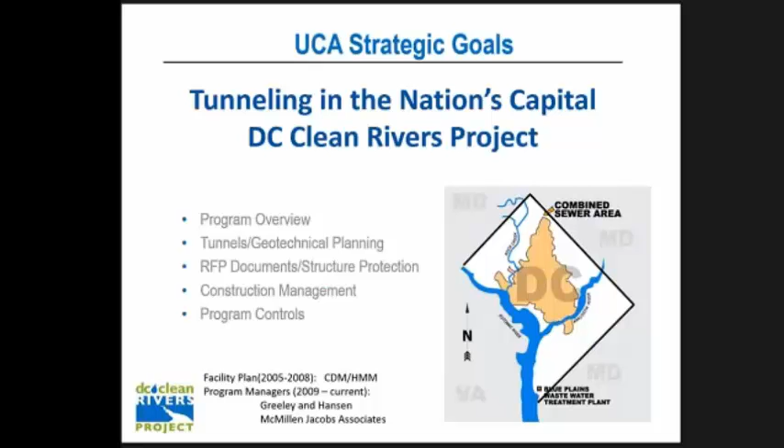So let's talk about tunneling in the nation's capital. I'm going to talk a little bit about an overview of the program, some of the tunneling and geotechnical planning that went on, how we put our RFP documents together, some structure protection, a little bit on construction management, and a little bit on program controls.

This program, the facility plan, was done in 2005 to 2008 by a joint venture of CDM and Hatch Mott MacDonald. And the program managers currently, starting in 2009, are Greeley and Hansen and McMillen Jacobs Associates.

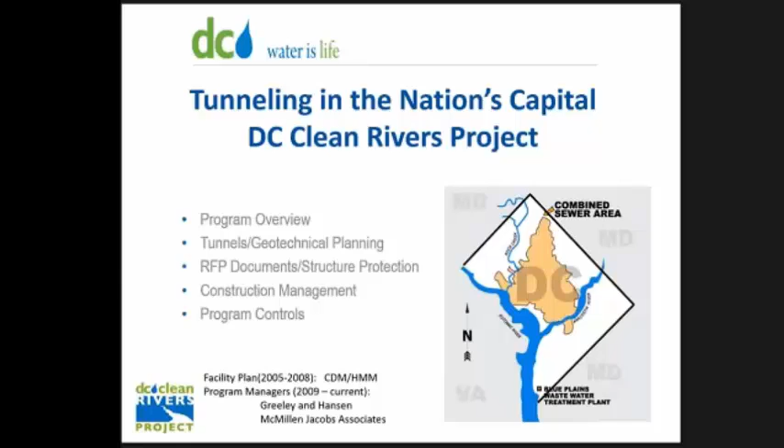So CSO, the challenge we have - CSO is combined sewer overflow, I think most of you understand that. In the District of Columbia, about 1/3 of the area is combined sewer facilities, the rest is separated sewer facilities. We have 53 CSO outfalls along 3 receiving waters: the Anacostia River, the Potomac River, and Rock Creek.

The single largest overflow is into the Anacostia River, where there's about 2 billion gallons a year that goes into the Anacostia River, in about 82 times a year, roughly, there'll be an overflow. So it's basically almost every time it rains, there's an overflow into the Anacostia River.

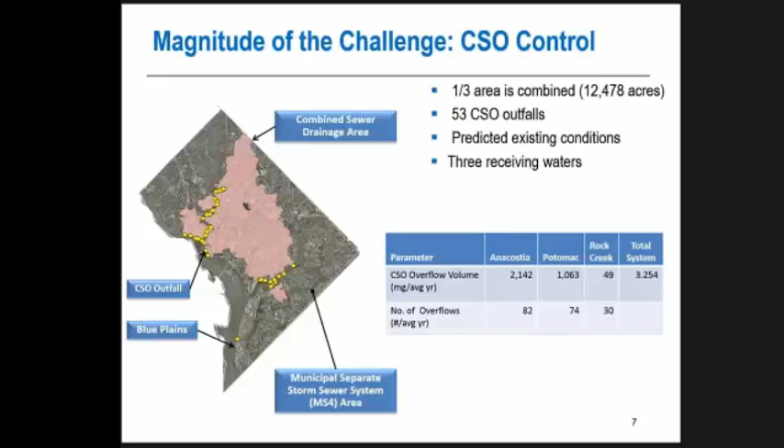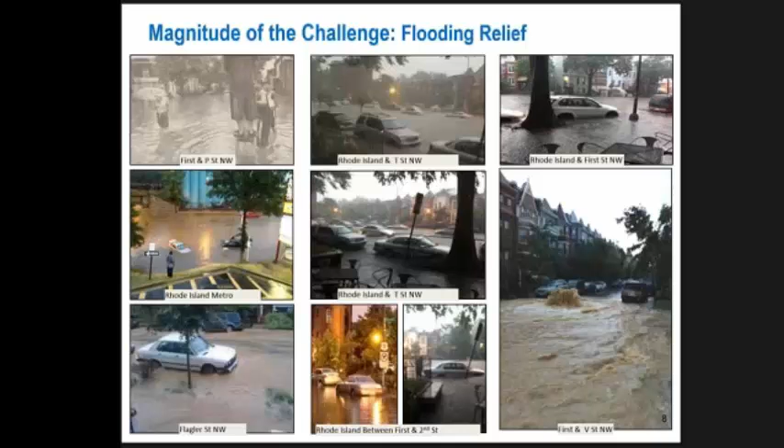So the solution that's been developed is a series of tunnels, both along the Anacostia River, shown in this slide in red, and along the Potomac River, shown in this slide in yellow. There's another CSO system up in the Piney Branch which we may or may not do as a tunnel, we may do as green infrastructure.

There are a number of pumping station rehabilitations shown in this slide as a P. The total value of this project is about $2.6 billion. And then there's a nitrogen removal system going on at Blue Plains as well.

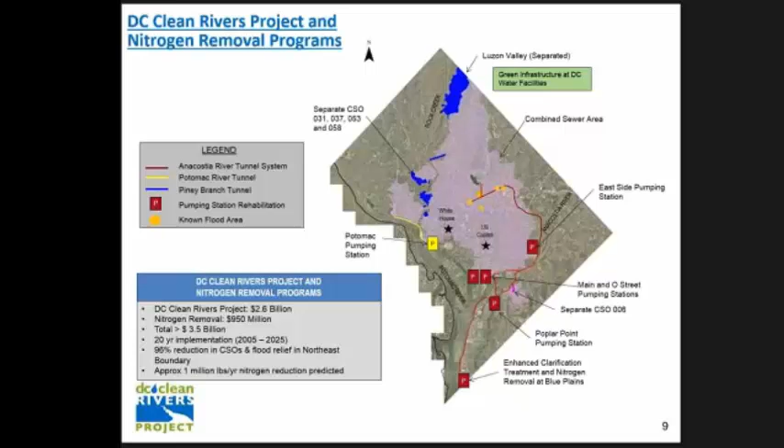We have a 20-year implementation cycle, supposed to be done by 2025, and will result at the end of the day in about a 96% reduction in CSOs, as well as flood relief in the northeastern boundary part of the city. So there was a consent decree.

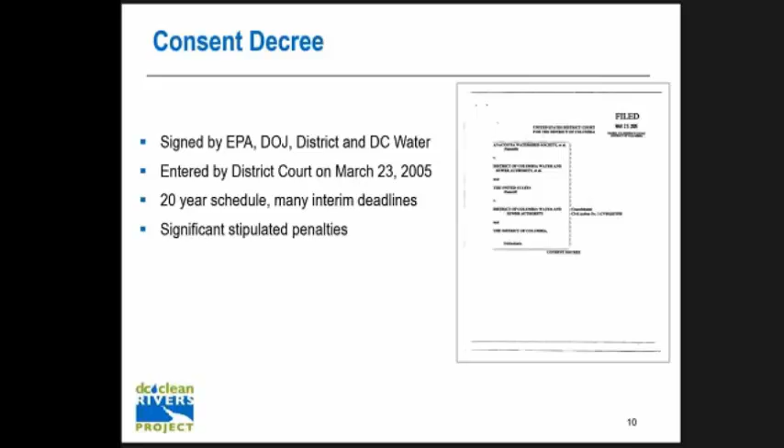The consent decree was signed by the EPA, the Department of Justice, the District of Columbia Government, and DC Water. It was entered into the district court in March of 2005 with a 20-year schedule - that's where the 2025 consent decree date comes from. There were many interim deadlines, one major one in 2018. I'll talk a little bit about that later, and significant stipulated penalties if these dates were not met.

Along the Anacostia River side, there's a series of controls - this slide is a little busy here, but on the right-hand side, the tunnel system starts with Blue Plains down in the lower part of the screen, the letter Y, and goes alongside the Potomac River and crosses the river. The blue line there is the Blue Plains Tunnel, the orange line is the Anacostia River Tunnel, and the green line is the Northeast Boundary Tunnel.

Way up in the northern part is the First Street Tunnel. So all of those tunnels, 4 major tunnel areas, are currently in either procurement or in construction.

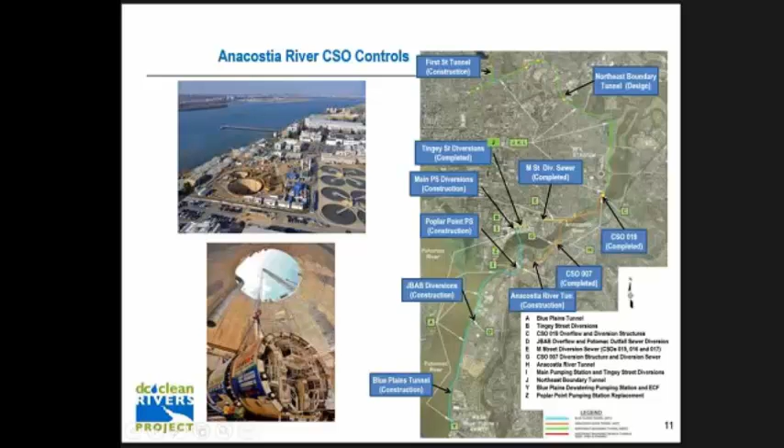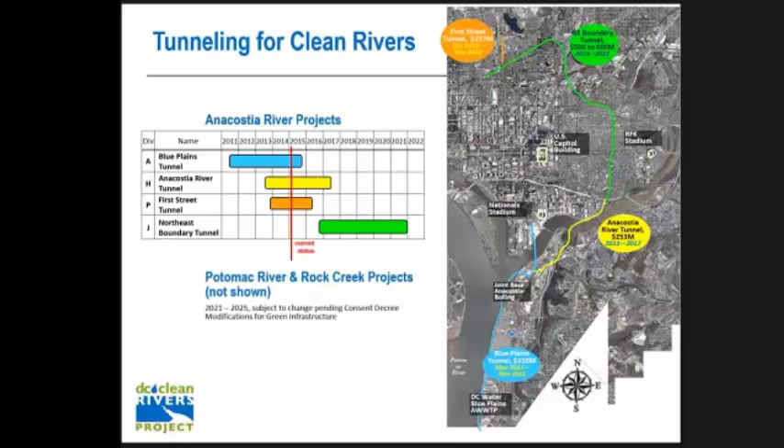I'll go into a little detail on the Blue Plains Tunnel. It's a design-build project, a 23-foot diameter soft ground EPB machine, about 100 feet under the surface, 23,000 feet long, including 5 shafts. The contractor is Traylor Brothers with Skanska and JayDee, a joint venture. Their designer is Halcrow, and the contract value is $330 million. They're scheduled to be complete in November 2015.

As of today, they're 76% complete, with the mining right about up here where my cursor is located, just south of Poplar Point area.

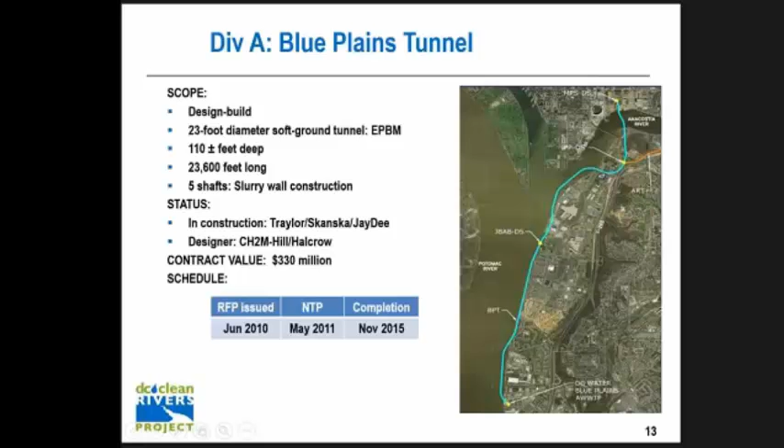There's a dewatering and screening shaft at Blue Plains. This aerial shot is taken over the Blue Plains treatment plant. It's a relatively large dewatering shaft, 135 feet in diameter and about 176 feet deep, all in soft ground. Very complicated shaft, both design and construction-wise. This facility in the back with the pier is the Navy Research Lab. Blue Plains is located just south of the Navy Research Lab on the Potomac River.

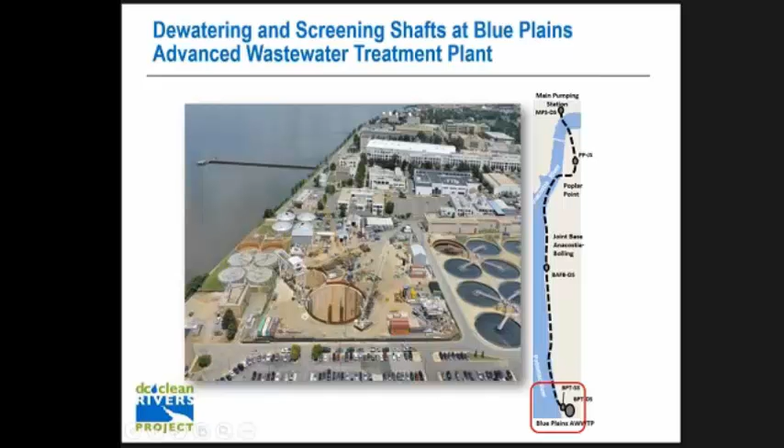The next slide shows a couple of photographs showing the dewatering screening shaft in the air, the TBM cutter head, and then looking down the dewatering shaft slurry wall.

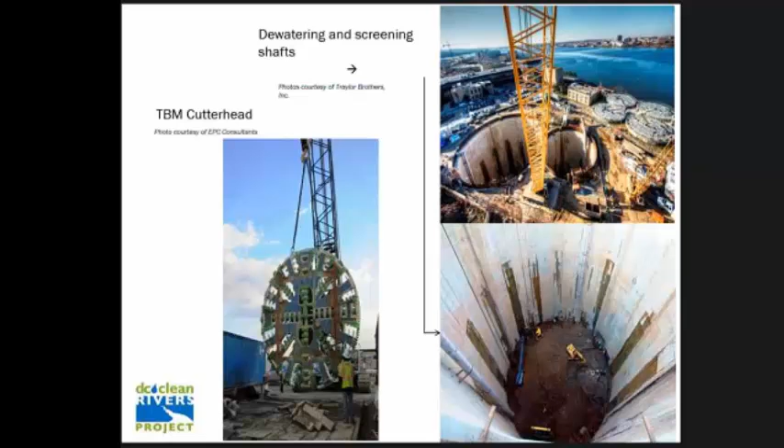This is a photograph of the tunnel boring machine currently being used. It's nicknamed Lady Bird. This photo was taken at the Herrenknecht factory in Schwanau, Germany, before it shipped over here.

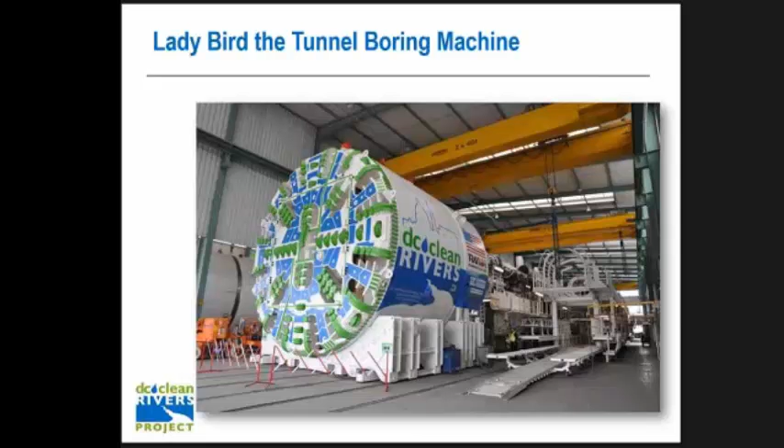These are a couple of shots of assembling the Lady Bird tunnel boring machine. This is down in the hole. The machine went down in the hole in 3 pieces: the cutter head, the tail shield, and the main body of the shield. The crane that set the machine down in the hole is a 660-ton crane, and I was told the largest piece was 475,000 pounds.

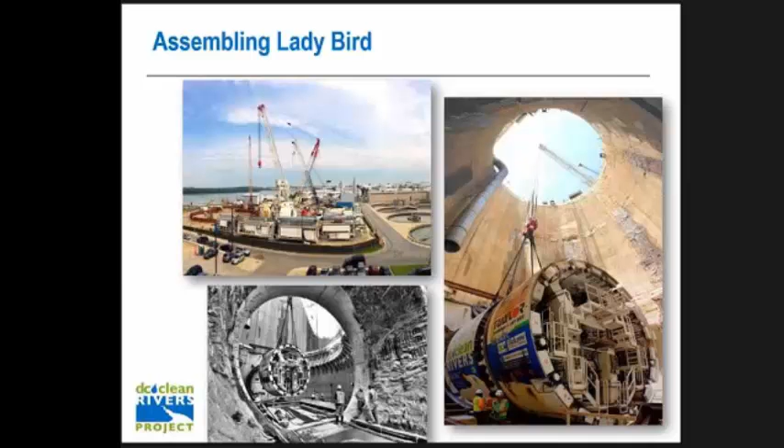This is a shot of the precast liner segments currently in production at the town of Brandywine, Maryland, about 30 miles south of the district. You can see some of the craft people finishing the top of the segments down there.

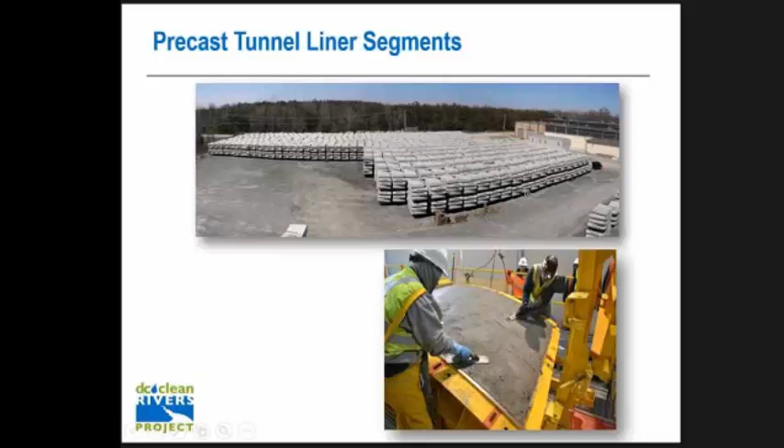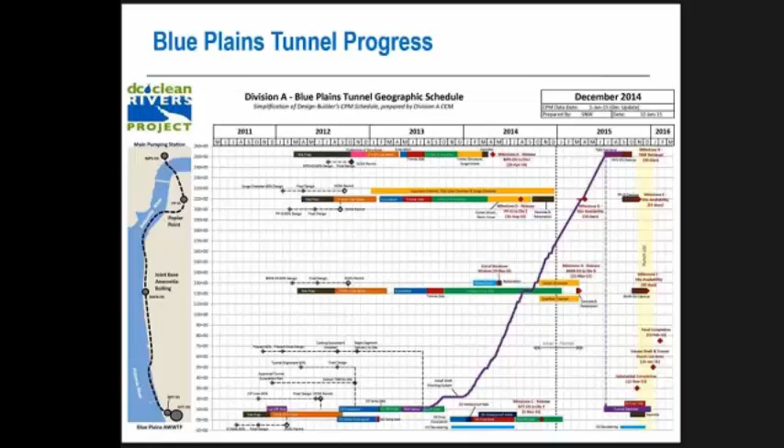The next contract I want to talk about is Division H, what we call the Anacostia River Tunnel. It's also a design-build project, same internal diameter, 23 foot, mostly EPBM with a small NATM component just south of RFK Stadium. The depth is about 100 feet, it's 12,500 feet long, and there are 6 slurry wall shafts along the alignment. Currently under construction by a joint venture of Impregilo, Healy, and Parsons. The designer is Parsons, contract value is $254 million. They got notice to proceed in June 2013, with completion scheduled for 2017.

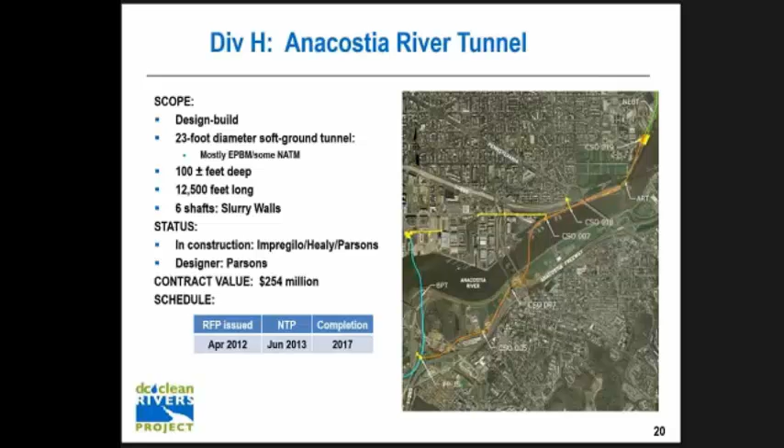This next slide shows an animation we did to show how the tunnel slides underneath a number of pile-supported structures along the alignment. I'll talk more about structure protection later and show some cross-sections, but this gives an idea of the forest of piles and other structures we go under along the alignment.

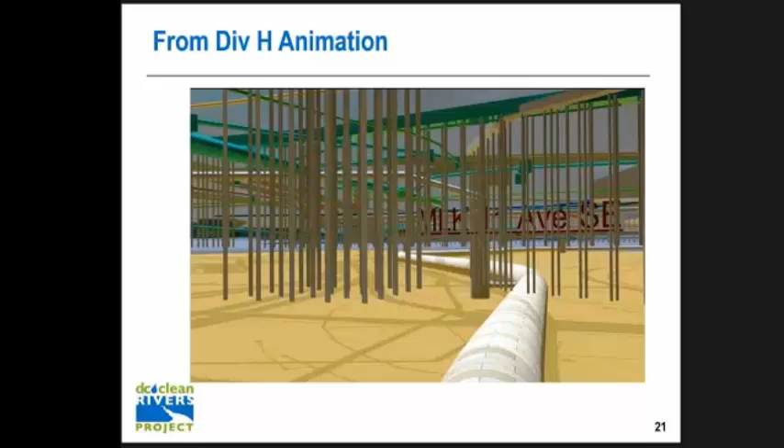The next tunnel is the First Street Tunnel, in the northern part of the city near McMillan Reservoir, a source of water supply for the district. It's a design-build hybrid, in that some structures were fully designed, but others, the tunnel and shafts, the lining, were design-build. We required a 19-foot minimum diameter, though the contractor is actually finishing slightly more than that.

It's anywhere from 80 to 160 feet deep. There's topography in this part of the city, so the start shaft is up on a hill, making it 160 feet at the mining shaft. There are 4 shafts and 3 diversion structures. There's a 10 MGD pump station at the lower end, which will pump out the tunnel after a rainstorm and put it into the normal sewer system.

Their designer is Parsons Brinckerhoff. Contract value of this is $153 million. We gave them notice to proceed in October 2013, with completion scheduled for early 2016.

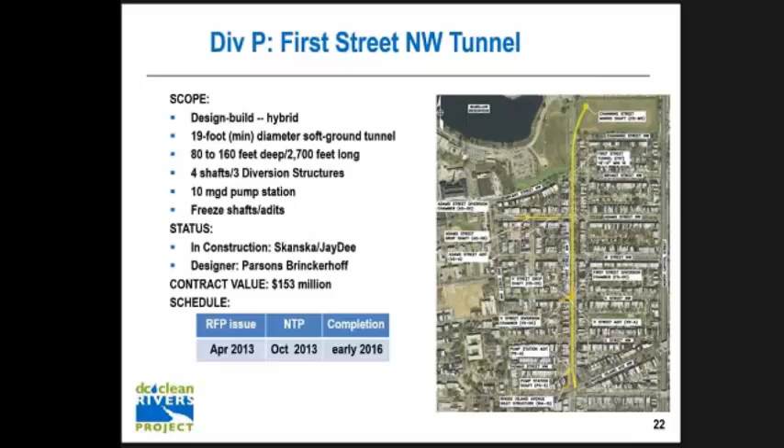This is a cartoon of the residential neighborhood in the area of First Street, taken along Flagler Street to give you a good idea of how near to residences this construction in the street is. Basically, the construction in this neighborhood goes curb to curb, so there's a lot of coordination necessary with the residents. We did quite a bit of that during the design phase, and the contractor and construction manager are dealing with that every day up there now as the work is currently going on.

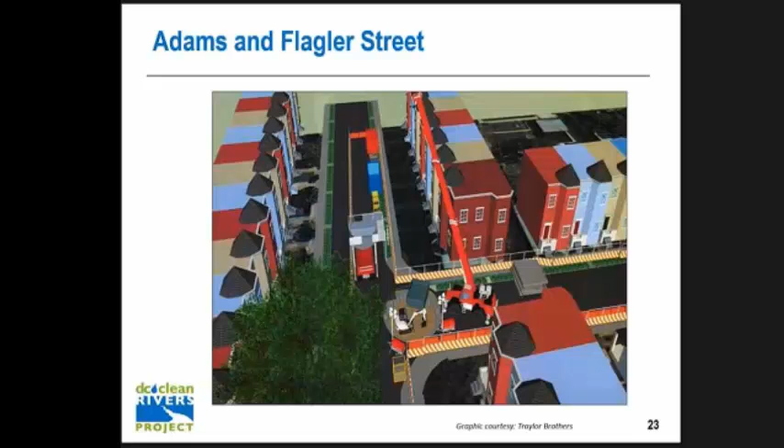Our next contract is the last major tunnel contract on the Anacostia River: Division J, the Northeast Boundary Tunnel. It will be design-build, 23-foot diameter, soft ground, anywhere from 50 to 160 feet deep. This will be the longest tunnel, 27,000 feet long, with 6 shafts and diversion structures along the alignment.

It'll be mined from just south of RFK Stadium. That will be the mining site, and it won't start until the Division H contractor, the Impregilo Parsons venture, is off the site. That's when we'll turn the site over to the follow-on contractor who will mine north out of there. It's currently in planning.

The RFQ will go out the 4th quarter of this year. We'll get a contract value pegged somewhere in the $500 to $600 million range, with notice to proceed in 2017, after Impregilo Parsons moves off the site, and completion in 2022.

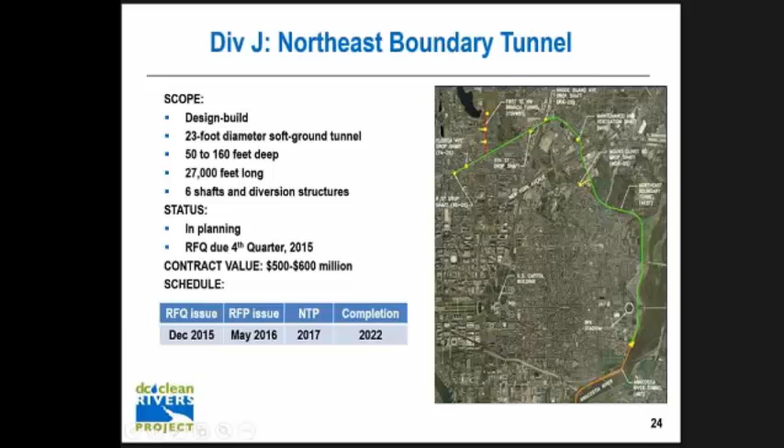The next slide shows a hydraulic profile of the system. We're required by consent decree to provide 157 million gallons of storage, achieved by water in the tunnel up to an elevation of -24. If it keeps raining, the rain will keep going into the tunnel until it fills up to an elevation of about +3, and then it will overflow into the Anacostia and Potomac Rivers at several overflow structures along the alignment.

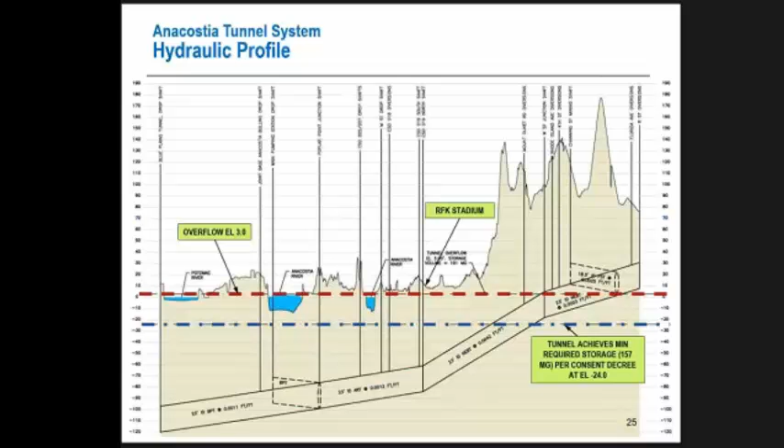We have a couple of different types of drop shafts along the alignment. One is the inline drop shaft, about 55 to 75 feet in diameter. The idea is that the tunnel boring machine mines into the drop shaft, which is used for TBM maintenance. After the tunnel is fully mined, the internals go into these drop shafts, and water drops down the drop pipe, goes around a deaeration channel to release the air, drops over the edge, and goes into an orifice at the bottom. These drop shafts were modeled at the University of Iowa, so we know they will work okay.

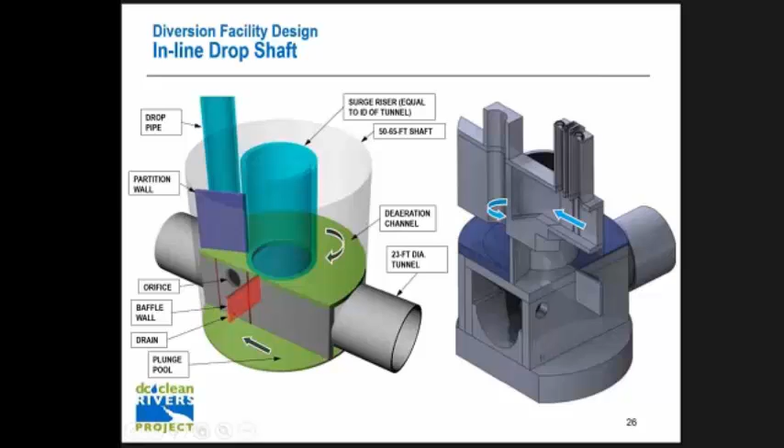The other type is the offline drop shaft, used for less volume of flow. These offline drop shafts handle smaller flows from the diversion structure through the approach channel, down the offline drop shaft and through an adit, where they deaerate. That's how the air gets out in the offline drop shafts.

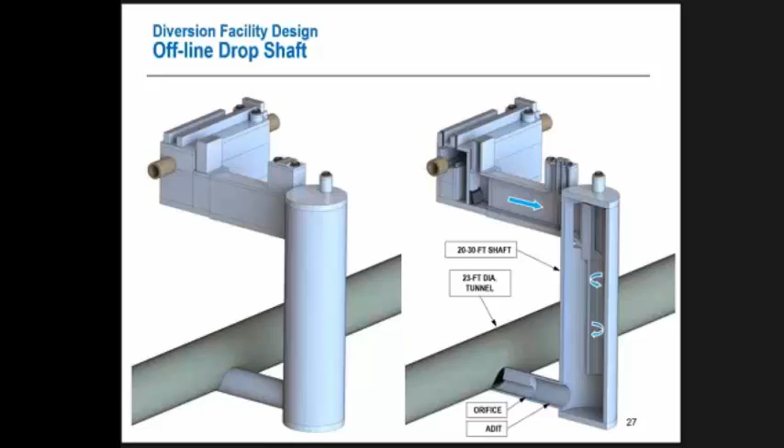I was going to talk about the tunnels and the geotechnical planning involved in the project. The horizontal alignment criteria included wanting it near existing CSOs and pumping stations, and away from underground features such as the Naval Research Lab pier and various DoD storm sewers at the Bolling Air Force Base alignment.

We wanted space for intermediate shafts where we have these online drop shafts, and space for the contractors to work. We followed public rights-of-way wherever we could to minimize the amount of easements necessary. And we wanted to cross railroads at right angles. We weren't always able to do that, but for the most part we crossed both CSX and the WMATA transit lines at right angles.

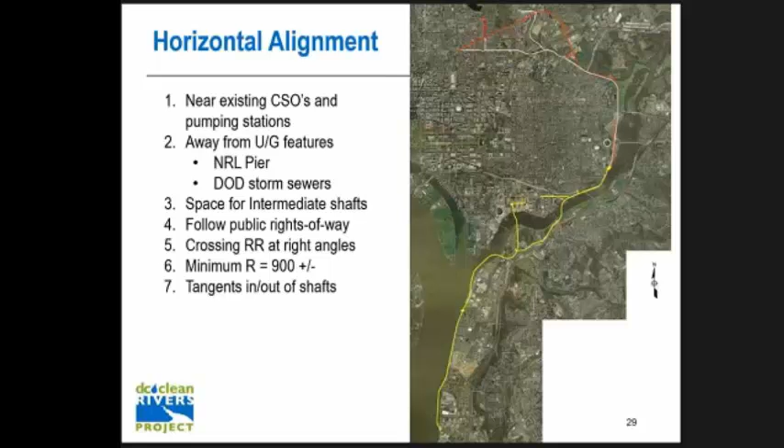We held a criteria of the minimum radius of curve on the tunnel at about 900 feet, plus or minus. I think we're down to 870 feet in some areas, but we didn't want to go much tighter than about 900 feet. We tried to hold a tangent into and out of the shafts to make it easier for contractors to come in and out without having to worry about turning curves.

On the vertical alignment, we had the pump station to go to at Blue Plains. We wanted a minimum grade of at least 0.1%. The depth was actually determined by getting under stuff along the alignment, and that stuff is bridges and DC Water sewer systems, and even DoD sewer systems, many of which are on piles in the soft ground.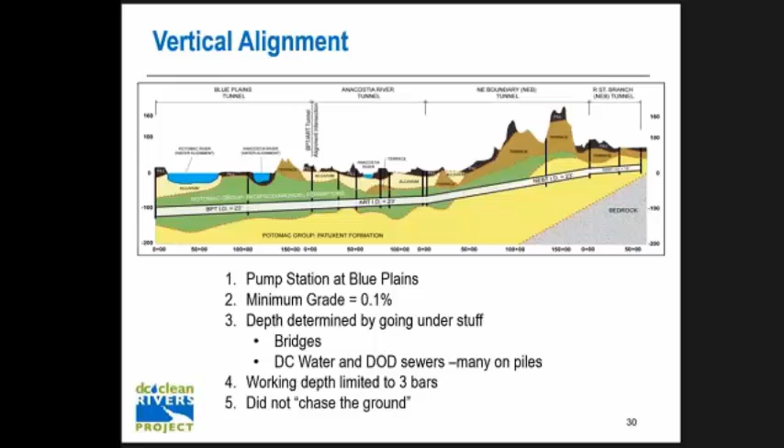This is an example of some of the cross sections along the alignment. The slide might be a little hard to read, but basically we're going under a forest of piles for many of these sewer systems, and we parallel some other sewer systems along the alignment. So we evaluated the zone of influence and what sort of ground subsidence we might see with a certain amount of ground loss in the TBM, and that was all done in the preliminary engineering phases.

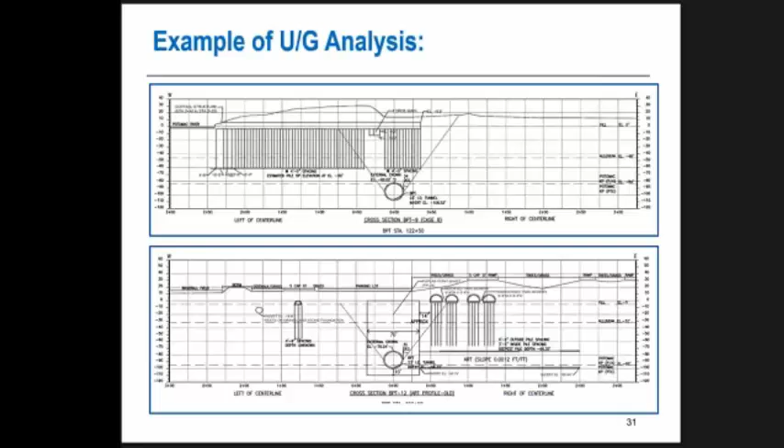So here's the promised geotechnical slide. This is geological investigations. The policy that we had was to have all these geotech investigations done by the owner prior to the bidding phases. That is, we didn't push any geotech investigations to the design builder.

They could, during the bidding period, request additional borings, and in fact they did, and we went out and got some. If they decided that we didn't have enough information for what they wanted to build, we went out and got more holes.

We did several at each shaft location. We did some pump tests, both at Blue Plains and at RFK Stadium. We found actually some flowing artesian pressures on the north side of Anacostia River. It ranged from about plus 14 to plus 20 in the ground units, and then plus 13 to plus 16 range in this area.

You can see in this geological lithology here, the green, the darker green, is the Patapsco Arundel Formation, which is mostly clays and silt. The lighter green at the bottom is the Patuxent Formation, silty clays and sands in the lower levels. We're overlaying on the top with some fill and some alluvium that you can see up on top.

Just for some figures here, the exploration program, we did 242 geotech borings along the alignment. It cost about $9 million in drilling costs and a little over $600,000 in lab testing. We had some geoprobes, mostly for environmental purposes, and geoprobes were a lot less in drilling costs, but substantially more in lab costs due to the lab tests we were running for chemistry permits and waste disposal of that environmental borings.

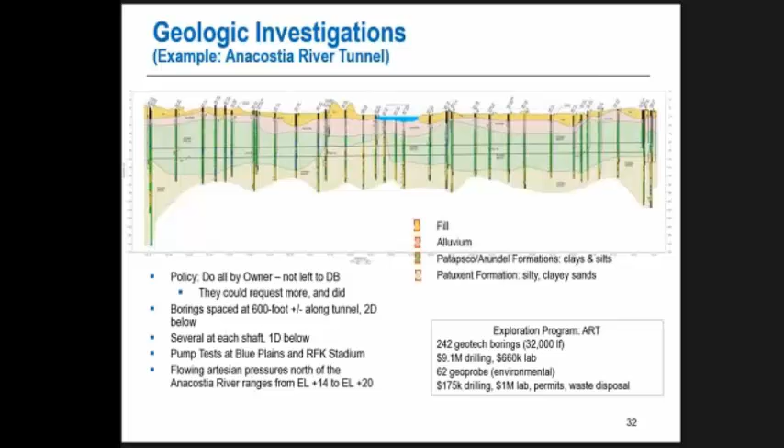So now I want to talk a little bit about RFP documents and structure protection. From the facility plan drawings that were done by the CDM Hatch joint venture, we advanced the design to 60%, to 90%, and 100% before we released them for bidding purposes. That effort was about 18 months for each of the segments.

We did have to modify our general conditions to revise the standard DC Water general conditions from a design-bid-build to a design-build method. The RFQ was scheduled to be complete and shortlisted firms identified when the RFP was ready for release, so we timed it that way.

And we established certain mandatory requirements in the RFP documents, and the drawings would show horizontal and vertical alignments and other mandatory geometries, mostly relating to hydraulic requirements. The wall thicknesses and reinforcing steel was left to the design builders. I'll talk about design criteria here on the next slide.

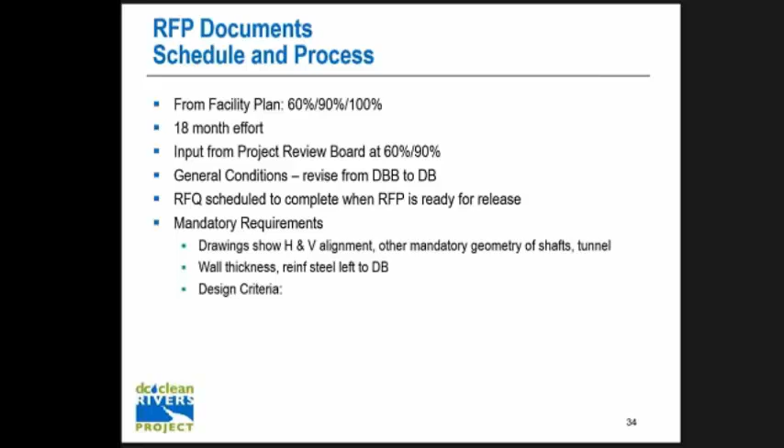This slide talks about the specifications. The Division 0 specs have the standard bidding instructions, contract forms, and all general conditions. In the general and special conditions, we included a baseline report.

We changed the retention practices, we had certain payment provisions. We included partnering, a dispute resolution process, DRBs, escrow bid documents. We had an owner-controlled insurance program.

In the Division 1 section, the design criteria provided included the design life of 100 years, the loading criteria and combinations of that criteria, the seismic criteria, certain limitations on shaft methods that were acceptable. We specified certain factors of safety that had to be used, geotechnical parameters, the leakage requirements, the hydraulic structures, and certain equipment that was necessary.

The Division 1 section is where the requirements are for how the design is advanced, what permits the owner had, what permits the design builder was intended to get, the various contract interfaces, temporary facilities, health and safety, and environmental stuff.

The technical specifications we call Category 2 and 3 were able to be finalized by the design builder. Some of the Category 2 specs included a tunnel boring machine or jet grouting or something like that, where there were certain prescriptive elements included in the outline specs that we gave to the design builders. They were to fill in the rest of them.

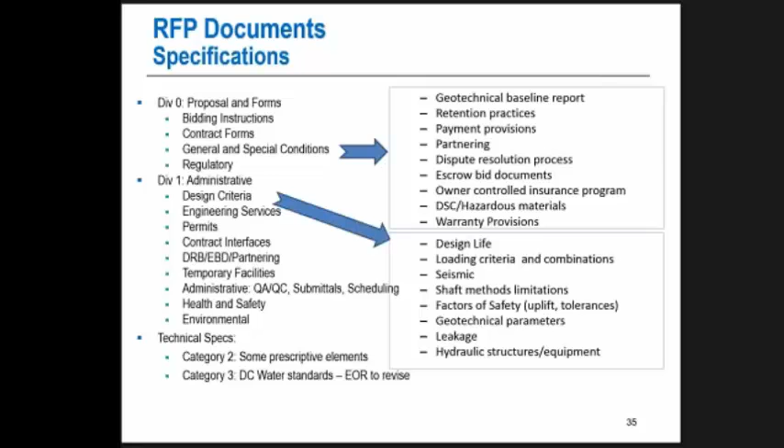On the geotechnical front, we had a GBR. The tunnel had functional baselines with some geotechnical components, primarily for abrasivity and stickiness. The shafts were baselined by borings at the shafts, and we had environmental baselines. Basically, the depth of contamination was specified.

I don't really have time to talk much about functional baselines, but there was a great paper on functional baselines given at, I think it was a RETC conference in DC here a couple of months ago. So look up functional baselines on onetunnel.org and you can get a good idea of what functional baselines are all about.

We also did a GDR with boring logs, lab results, and groundwater and soil chemistry as well.

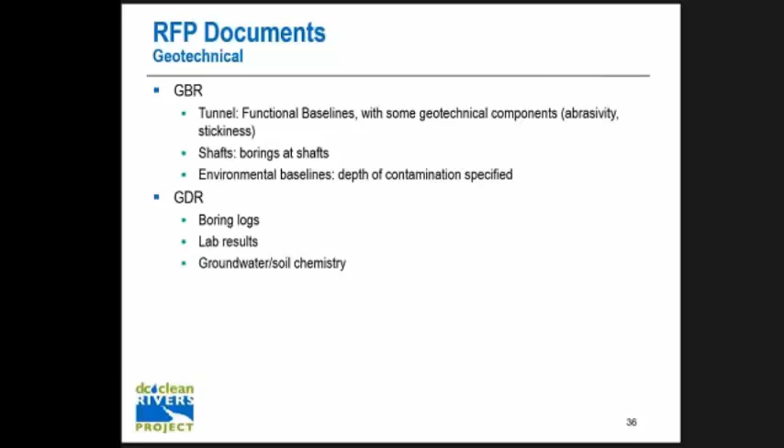I want to talk a little bit about protection of structures. The RFP documents identified the utilities and the various structures that the lines were going under. I showed you a cartoon of that, an animation of that before.

We required the contractors and the designers to do construction impact assessment reports, which required both modeling of soil movement based on their means and methods of construction, and structural modeling to see whether the structures were going to see any distress because of that.

So this picture here is a picture of one of the relatively large sewers that were going under. Some of these sewers, this one in particular, was built in the early 1900s, 1901, 1902 area.

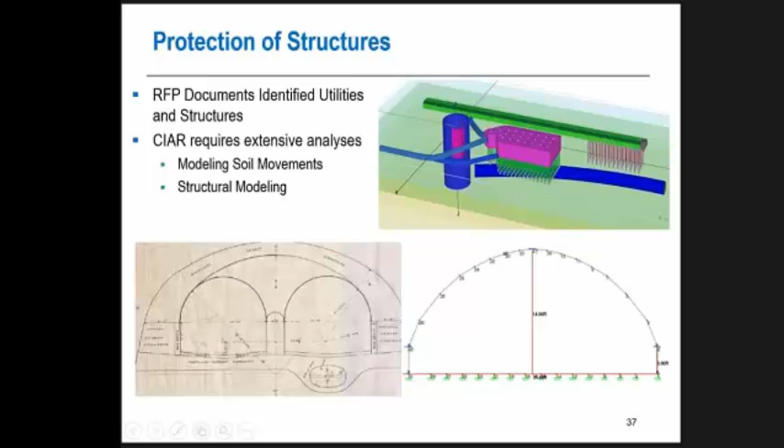Anyway, so the design builder's engineer modeled these structures using a numerical modeling method. He used the site-specific soil parameters, lab data, in situ soil testing from the GBR and from the GDR. The soil movements were calibrated with empirical methods using a certain volume loss, both for the tunnel and for the panel and the various shaft excavations.

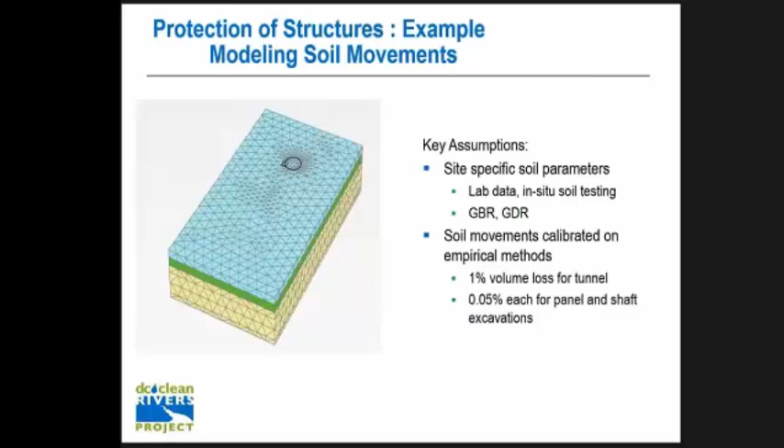The result of all that soil modeling was some ground movements that could be expected given those excavations. So he modeled this and came up with a certain amount of ground loss that these structures may be able to be subject to.

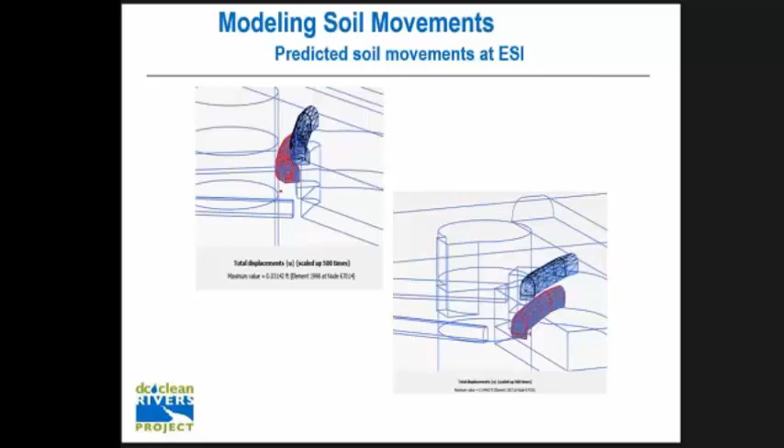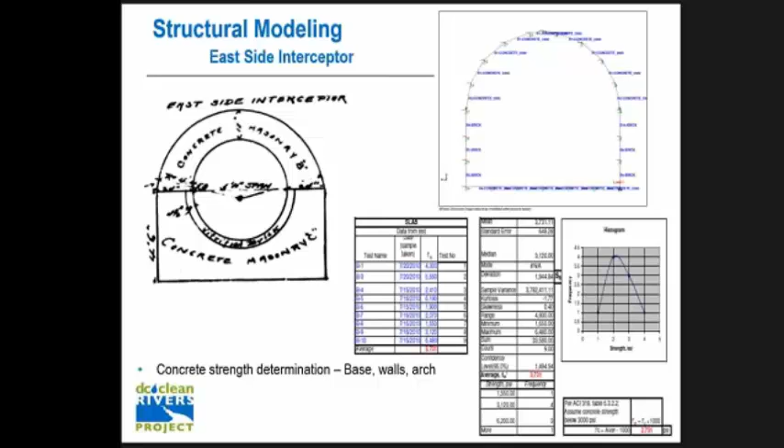So then he took that ground loss and went into a structural model, and given the actual capacity of these structures, we actually went into them and took some cores, using statistical analysis to evaluate what the concrete strength of these existing structures was likely to be, both at the base of the walls and the arch. We ran these movements into the structural model and concluded that in several cases we were going to need to do some sort of mitigation of these structures.

One of these mitigation measures turned out to be ground improvement, and you can see Hayward Baker's equipment there doing some soil cement columns in one area. We also did some structural rehabilitation, some bracing inside one of our existing sewers.

You can see here on the left, it's a relatively large sewer that was going to see some distress if we didn't do some bracing systems.

The payment approach for this was that we did not expect the contractors to carry this mitigation cost in the bid price. We did cover the cost of construction of some of these mitigation items as an allowance item, and that's how we paid for it.

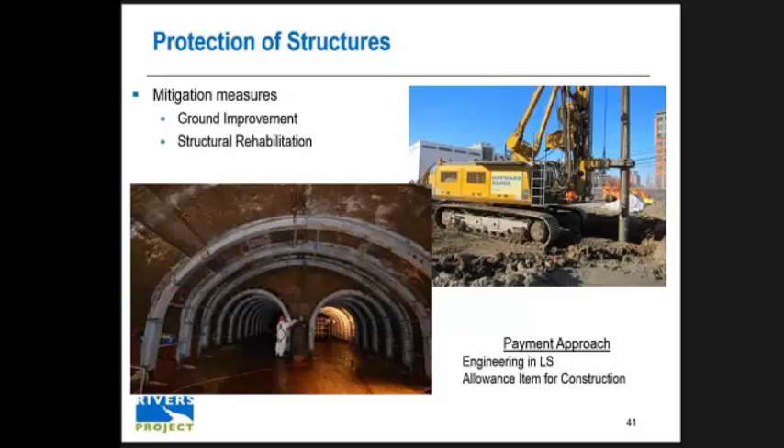This slide shows the design for the soil mix columns used to protect one of the sewers that we determined was going to see some distress if we didn't use soil mix columns. This is the soil mix tool used in the Hayward Baker method for soil cement. Some of the columns were 8-foot diameter, some smaller, 2 or 3 foot diameter, right next to the existing sewer.

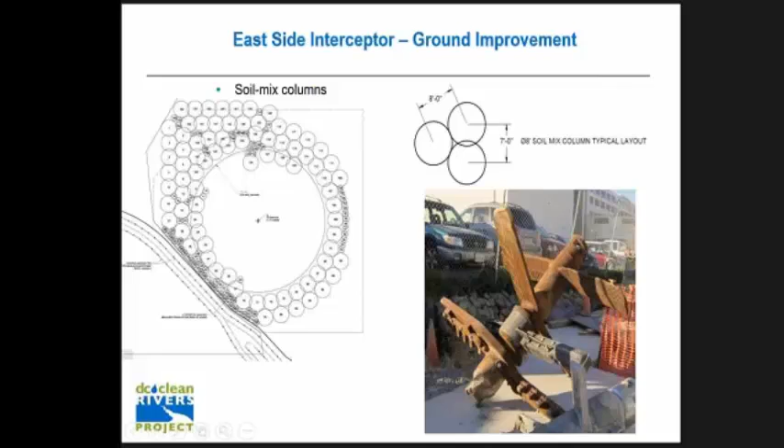We think it worked because the soil cement went down about 50 feet below the ground, through the fill and through the alluvium.

This slide shows the results of some inclinometers that were installed. In the lower Potomac Formation, where we did not do the soil cement, we got movements in the 0.2 inch range. Up in the upper levels where we did do the soil mixing, we got less ground movement, as shown by these inclinometers. So we think it worked pretty good. We're quite happy with the results.

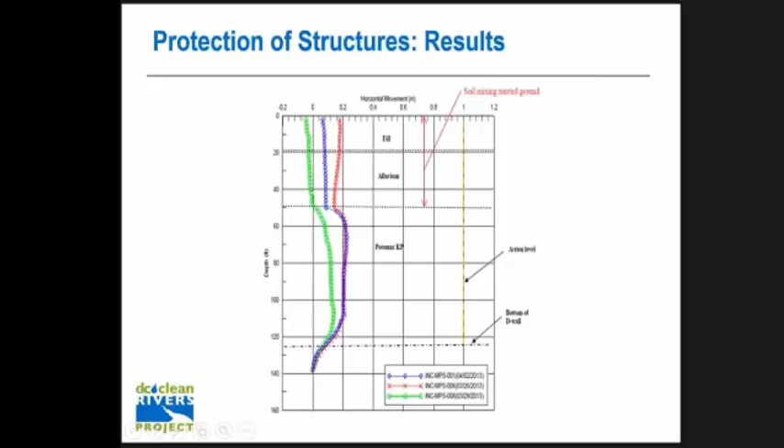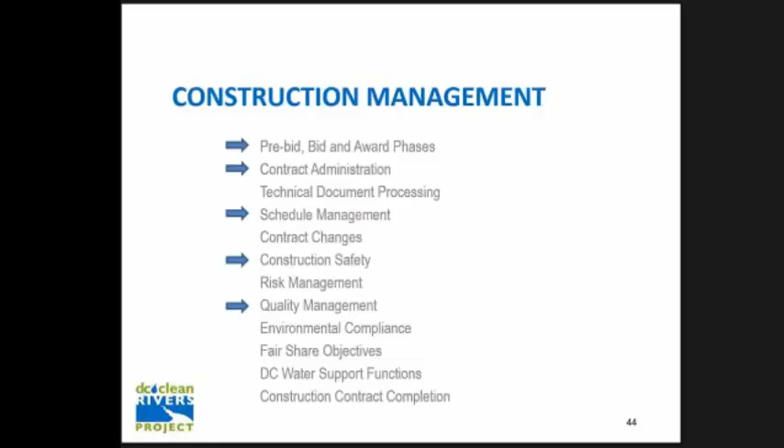I'll talk a little bit about construction management. There's a whole laundry list of things our construction management teams do on site. We have separate contracts—DC Water holds separate contracts with the construction managers, that's not part of the program management. During the pre-bid and award phases, there's a lot of coordination on scope development, master program schedule, constructability reviews, permitting and rights-of-way, bid and award assistance, and developing procedures.

During construction, there's an immense amount of contract administration. The CM is the primary point of contact for formal correspondence with the contractor. That firm manages the partnering and dispute review board processes, manages all pre-construction conferences, enforces the terms of the contract, schedules periodic meetings, reviews and processes pay requests, documents the work done every day, and manages the document control system.

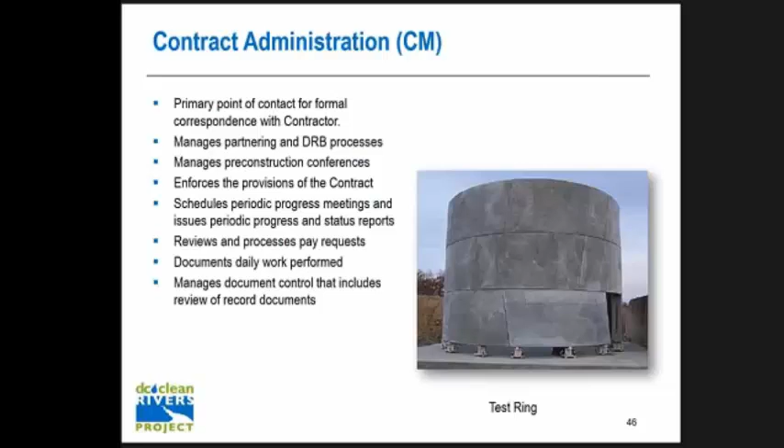On schedule management, the CM provides input to the program master schedule, reviews the contractor's baseline schedules and schedules of values, reviews the contractor's monthly updates and revisions, monitors work progress, and reviews variances and variance recovery schedules as necessary.

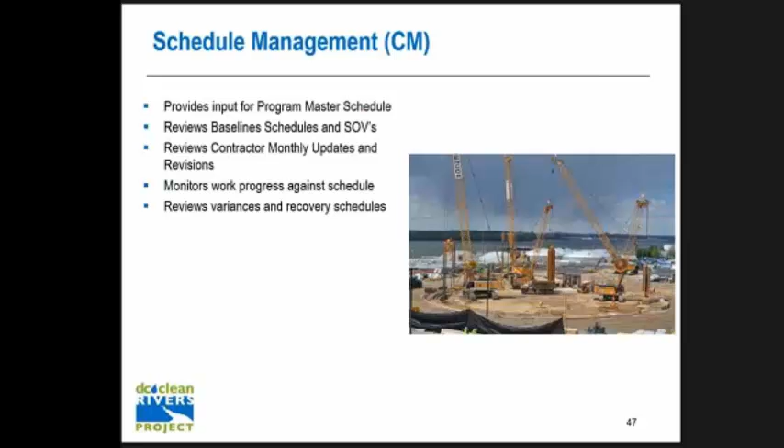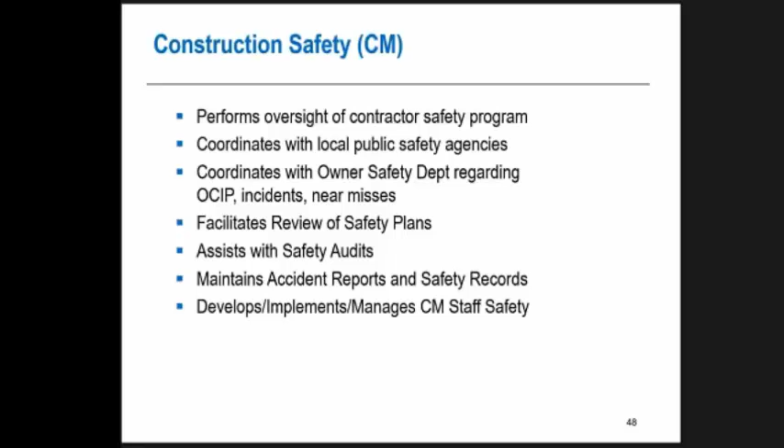For construction safety, the CM provides oversight of the contractor's safety program, though the contractor is still responsible for safety. The CM coordinates with local public safety agencies, the owner's safety department, and the owner-controlled insurance program, which has its own safety people doing inspections. It assists with safety audits and develops, implements, and manages the construction manager's own safety program.

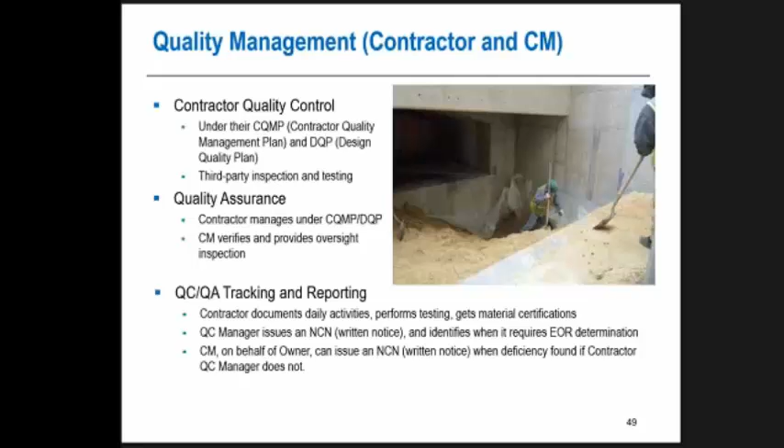There's a quality program as well—both the contractor and the CM have quality programs. The contractor submits a contractor quality management plan and a design quality management plan, which includes third-party inspection and testing. Quality assurance is done both by the contractor for their program and by the construction manager, which provides oversight inspection. There's QA/QC tracking and reporting by the contractor. The QC manager may issue a non-conformance notice and identify when that non-conformance would require the engineer of record to look at it and specify what needs to be done. Those are all stipulated in the specifications for quality control.

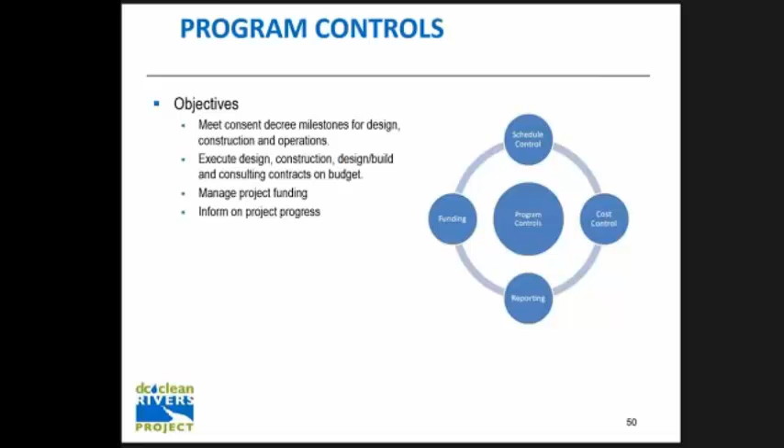On the program control side, the objectives are to meet the consent decree milestones for design and construction, execute the design, construction, and design-build contracts on budget, manage the funding, and inform the decision makers on the owner side about progress. That's basically what our program controls do, using various tools.

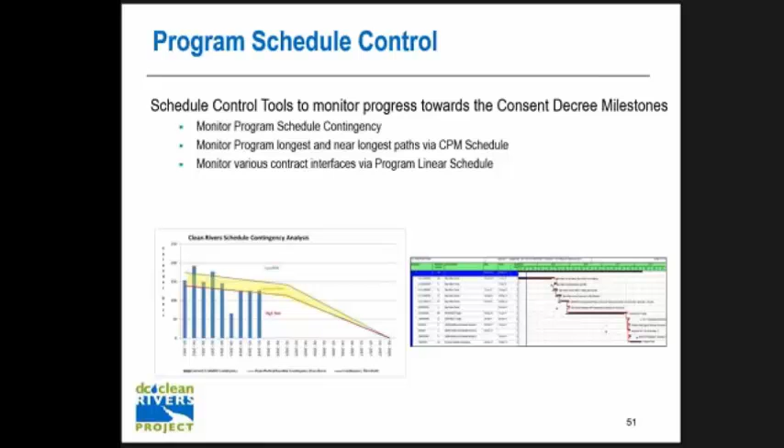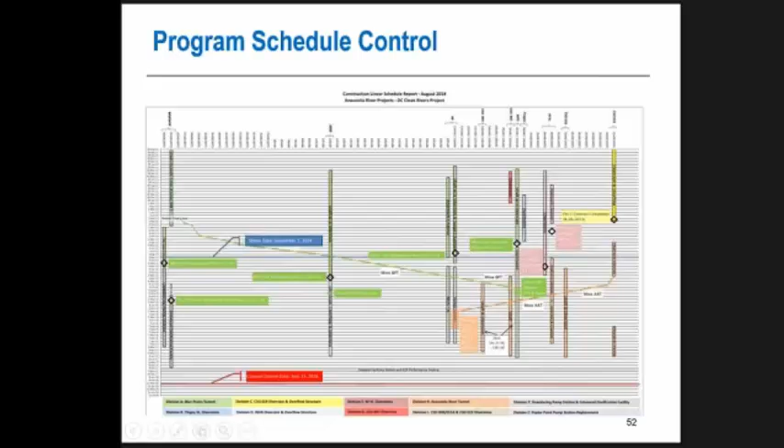We monitor many of our contract interfaces using a linear schedule, shown on the next slide. There's more information on there than you can easily see, but time on this chart starts at the top and advances downward, with the consent decree date at the bottom. The stationing along the alignment is on the horizontal axis, so you can see these sloping lines—sometimes called sloping line charts. The green line belongs to the Blue Plains Tunnel, the orange line to the Anacostia River Tunnel, and these vertical bars are structures at specific stations along the line. We find the graphic illustration of schedule really useful.

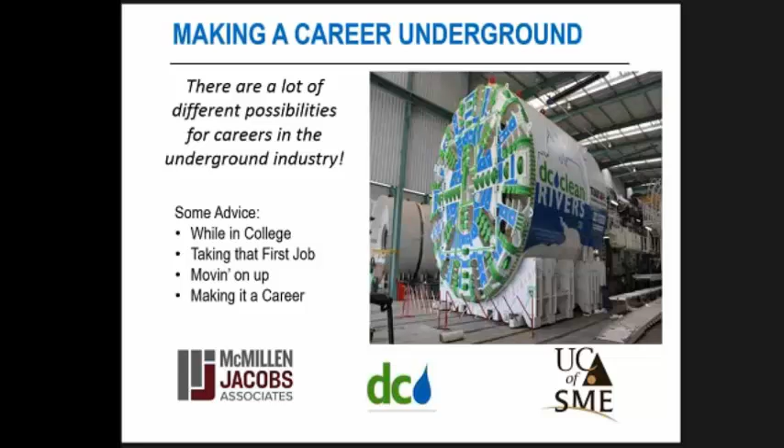So I'm going to switch gears here and talk about making a career underground. Clearly there are a lot of different possibilities for careers in the underground industry, so I've got some advice on the following slides, starting with making the most of college.

Take English and economics and human capital. Don't forget that when you're out there in the real world, you're really going to be dealing with people, and it's important to learn how to get along with people. Engineers just don't sit in a room by themselves and take the information out of their in basket and put it into their out basket.

Recognize you get a lot more from projects than you will from classes. Appreciate the projects that are multidisciplinary. The schools will want to establish multidisciplinary projects, and that's just because that's the way we do it out there in the real world, and deal with a lot of people that are of different disciplines.

If you plan to go into the design world, you probably in the underground industry need a master's degree to do that. If you want to go into construction into the business, there's a lot of opportunities there, or construction management. In my opinion, a bachelor's is fine for that. And probably the most important advice there, take the FE exam while you're still in school, because if you wait until several years later, it's really hard.

The first job, don't be too picky. Align your personal and your professional goals and dreams. Use your capacity to learn, and especially try something new or move to a different location. I've moved around a lot. I like moving around, but it is useful to move around to a different location and see the country, see the world, and learn how things get built.